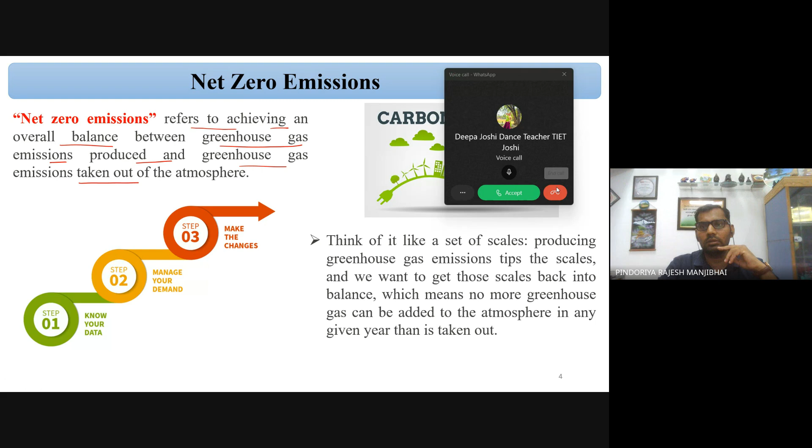Just 1 minute, just 1 minute.

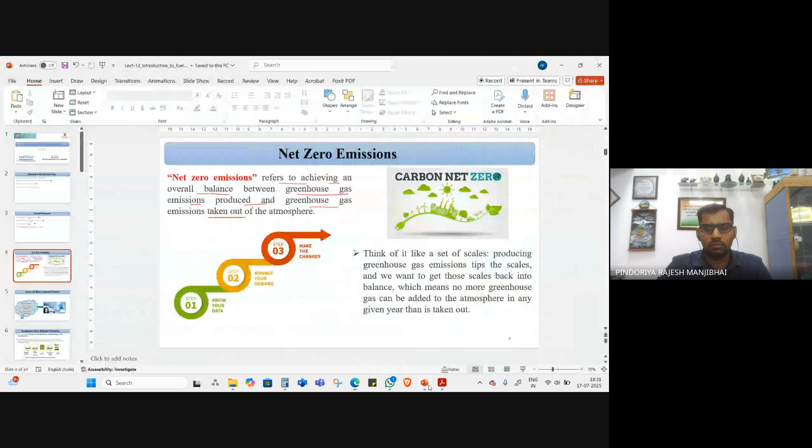Yeah, okay. So suppose you are designing the electric vehicle and you are producing 100 kilograms of CO2 in the environment, correct? So after the production of your vehicle, you have to put in the technology to reduce the 100 kilograms of CO2 from the environment. Then we can say our application, our design, or our product produces net zero emission.

So whatever amount of CO2 you produce during the design, after the design we have to remove that 100 kilograms of CO2 from the environment. Then we can say our design or our product is net zero emission. So how can we achieve this? Step one: know your data. First you have to find out how much CO2 will be produced from the product. Then you have to manage your demand, because we cannot compromise with our product.

Suppose you are planning to make like 50 electric vehicles per day, but because of the CO2 level, you cannot compromise with the product. Okay, so we have to manage our demand, then make the changes. What type of changes can we make so we can achieve net zero emission? Think of it like a set of scales: producing greenhouse gas emissions tips the scales, and we want to get those scales back into balance. That is the simple meaning. Whatever amount of CO2 you produce, we want to remove it after the production.

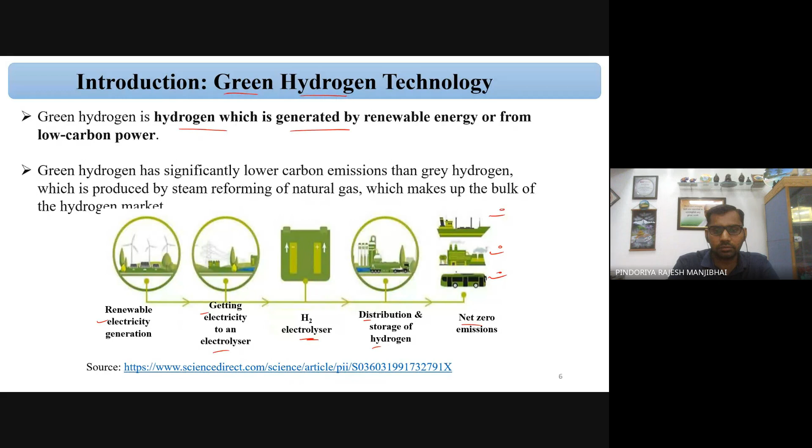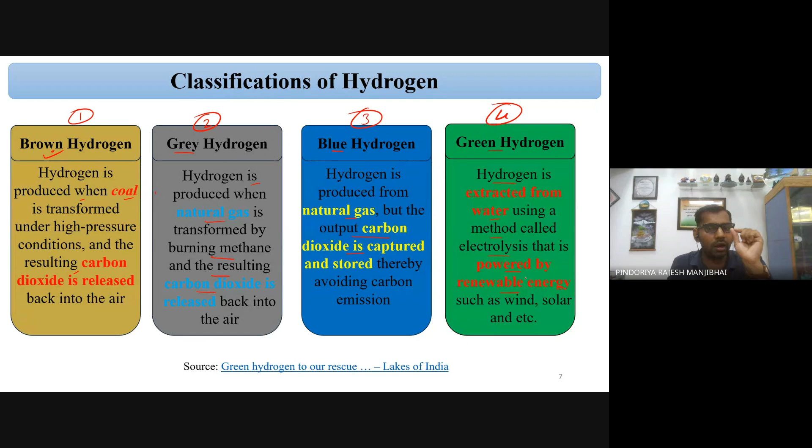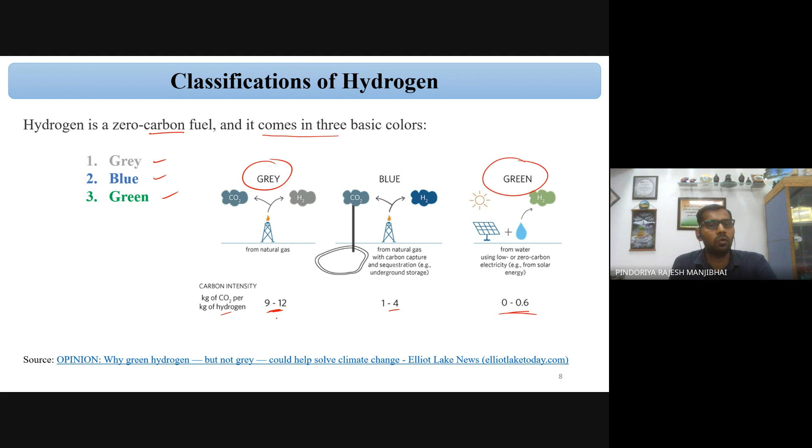Correct? So you can see green hydrogen produces very, very little CO2, but gray hydrogen produces 9 to 12 kilograms of CO2 per kilogram produced. Okay. So that's why people want to use green hydrogen instead of gray and blue. Okay.

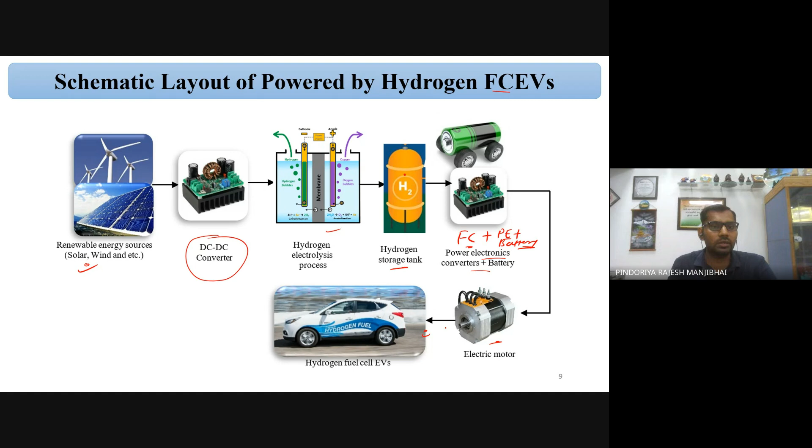So three components here. There is a fuel cell, because the fuel cell produces the electricity, then power electronics, then battery, and finally the electric motor, and finally the hydrogen fuel cell electric vehicle. So these are the major components in the hydrogen fuel cell electric vehicle. So, schematic layout of the green hydrogen vehicle.

So yes, students, if anyone has any confusion, then please let me know.

So the schematic is the same as the battery operated electric vehicle. The only changes are the fuel cell and the hydrogen tank. In the IC engine, we have a petrol and diesel tank, but the fuel cell is missing. But in the hydrogen vehicle, we have a hydrogen tank and we have to add the fuel cell plus electric motor. Correct? So the only additional components are the fuel cell and the hydrogen tank. Suppose we are saying it is a green hydrogen vehicle. Okay.

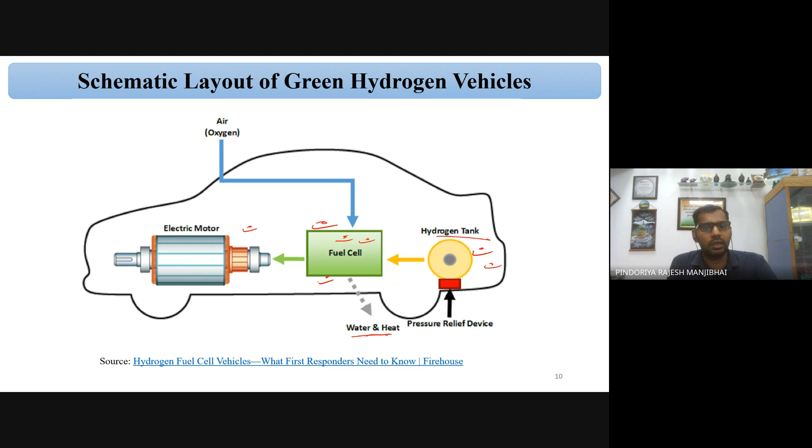And the output is only water and heat, and the water is only drops of water. It is not like 1 liter or 2 liters of water. It is only a few drops of water, and that is the only outlet because CO2 is 0%, so no CO2, only water and heat. Correct? So that is the outlet, we can say.

So how does it work? Hydrogen is passed into the fuel cell. We pass the hydrogen into the fuel cell along with the air. The air we can pass directly from the environment, as shown in the figure. So we only have to pass the hydrogen plus air into the membrane, otherwise we can say the fuel cell.

Okay, inside the fuel cell, the hydrogen atom is split into protons and electrons. So this is the fuel cell. Inside the fuel cell, the hydrogen atom is split into two components: protons and electrons. The electrons, especially the steady flow of electrons, are the electricity used to operate the electric motor, and that drives the vehicle. Okay, so this is just the operation of your vehicle.

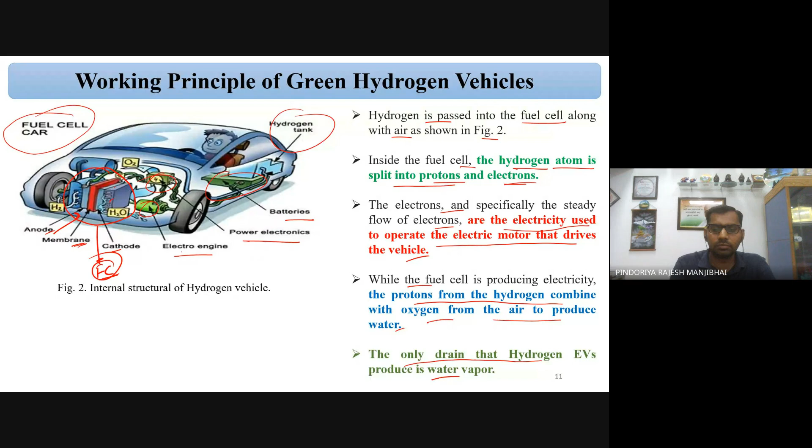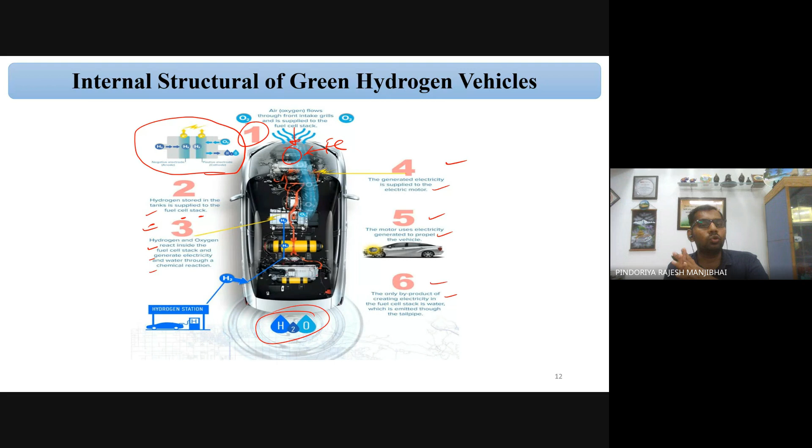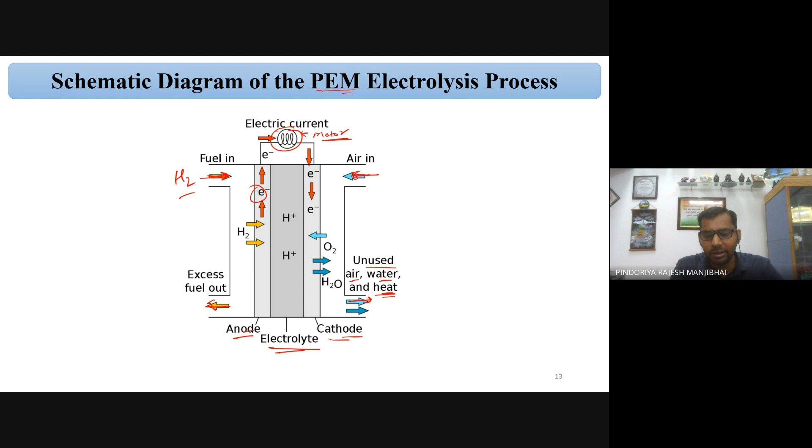So water is not too much, and heat we can again convert the heat into maybe cooling, or maybe any other application, correct? But ultimately there is a loss. So detailed mathematical modeling as well as chemical reaction we will discuss in maybe the next class.

So what is a fuel cell? So till now, any confusion, any query for the fuel cell? Any query? Sir, not on the fuel cell thing, for the hydrogen vehicle. Yes, sir, one thing.

Sir, how can we control the reaction within the fuel cell to increase the amount of electricity?

That is the major disadvantage in the fuel cell, otherwise we can say the hydrogen vehicle. One thing is storage of the hydrogen, how we can effectively store the hydrogen, because hydrogen is very dangerous. And second thing is controlling the flow of the hydrogen, because continuously we have to generate the electricity. So how we can control the flow of the hydrogen, correct? So that is a major challenge as of now for the fuel cell electric vehicle.

So exactly I don't know, so how we are able to control the flow of the hydrogen, but still research is going on, and that is the only two disadvantages in the fuel cell electric vehicle. First one, that is storage of the hydrogen, how we can effectively store it, so there is no dangerous effect in the vehicle. And second one is flow of the hydrogen, how we can control the flow of the hydrogen. So those are the two major challenges as of now.

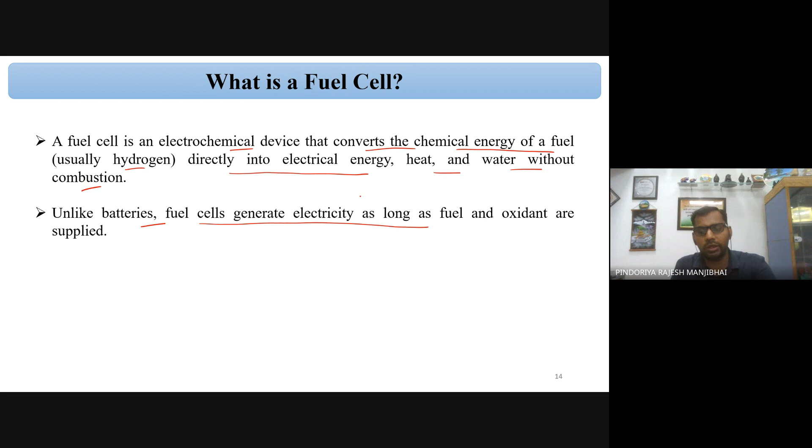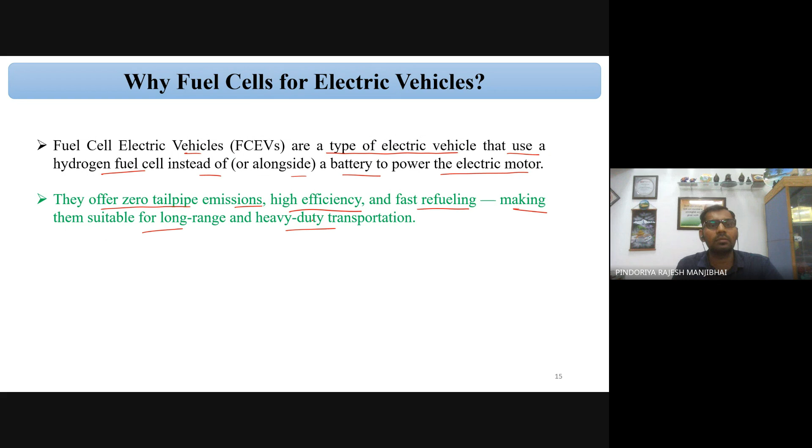They offer zero tailpipe emission, high efficiency, fast refueling. So just suppose you want to refuel the hydrogen, it will take only 2 to 3 minutes. It is the same like CNG, compressed natural gas, correct? Making them suitable for long range and heavy duty transportation. So that's why people want to use the hydrogen vehicle. So high efficiency, zero tailpipe emission, and fast refueling.

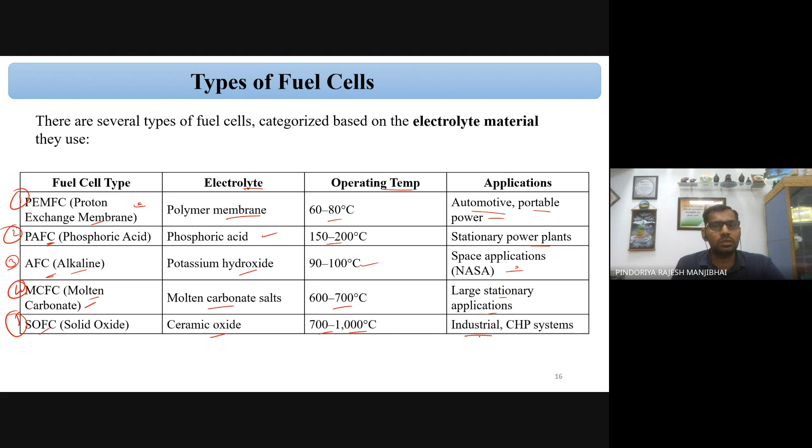Yes, so these are the types of fuel cells which we can use for different applications. For electric vehicles, we can use only proton exchange membrane as of now.

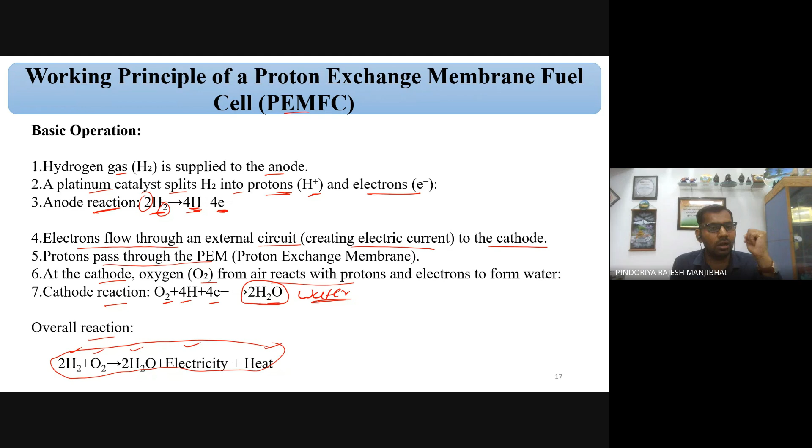Is there any confusion for this reaction? There is an anode reaction and a cathode reaction. Because this is a chemical equation, maybe you forgot the chemical reaction, so if you have any confusion, please let me know. Because this is a balanced equation, we account for hydrogen atoms as well as oxygen atoms, and the output is electricity plus heat.

Sir, how only protons can pass through the membrane? Yeah, that is part of the electrolysis process, correct? So we can use different types of membranes. There is a membrane property: they cannot pass electrons, they cannot pass both properties equally. That is a property of the membrane. That's why I said for the fuel cell, the heart is the membrane. Based on this membrane, we can pass particular protons and particular electrons.

Suppose we use a low cost membrane, correct? Not a high cost and high efficiency membrane. Then it is very difficult to pass the proton and electron separately. So it is a property of the membrane, and that is the heart of the fuel cell. Got it? Yes. Otherwise, it is very difficult to achieve separation of the proton and electron. It is very difficult.

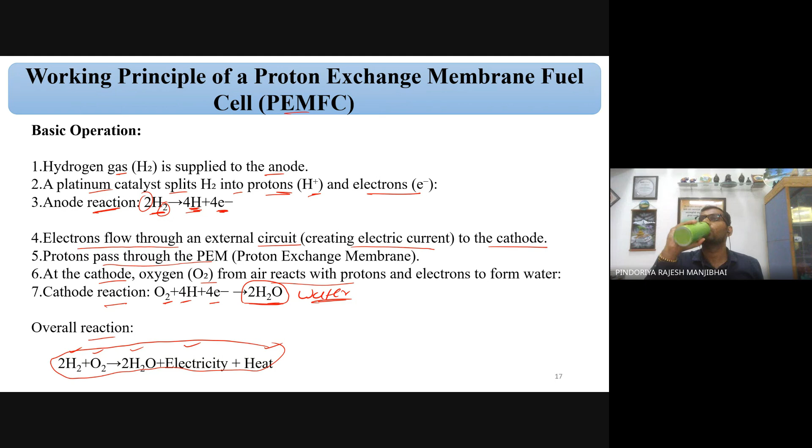So key characteristics of the proton exchange fuel cell: operating temperature 60 to 80 degrees. Efficiency 40 to 60. In the IC engine, efficiency is maximum 20 to 23%, but in the fuel cell, the proton exchange membrane fuel cell efficiency is up to 60.

Startup time less than 1 minute. Power density high. Emission is only water vapor, so no CO2 emission. Fuel is pure hydrogen, needs purification. Voltage per cell is 0.6 to 0.7 volt, depending on load and temperature. So normally voltage per cell is 0.6 to 0.7.

So this is the same as we can say the battery cell, correct? In the battery cell, we can say nominal voltage is 3.7 volt. But in the fuel cell, voltage per cell is 0.6 to 0.7. It is the same like the semiconductor diode forward voltage. In the diode, forward voltage is 0.7 volt, correct? So it is the same as the proton exchange membrane fuel cell, voltage per cell being 0.6 to 0.7 volt.

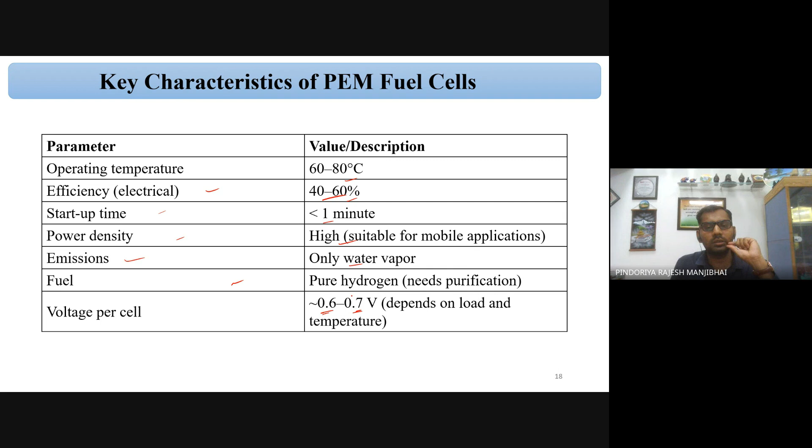So example of the proton exchange membrane fuel cell used in vehicles: Toyota Mirai, Hyundai Nexo, Honda Clarity fuel cell, hydrogen buses and trucks. Hydrogen trains already run in India, on the railway track in Himachal Pradesh, and in Germany many vehicles are based on hydrogen. So we can say it's a green hydrogen vehicle with zero emission. As of now you can see Toyota Mirai, Hyundai, Honda Clarity fuel cell, and hydrogen buses and trucks.

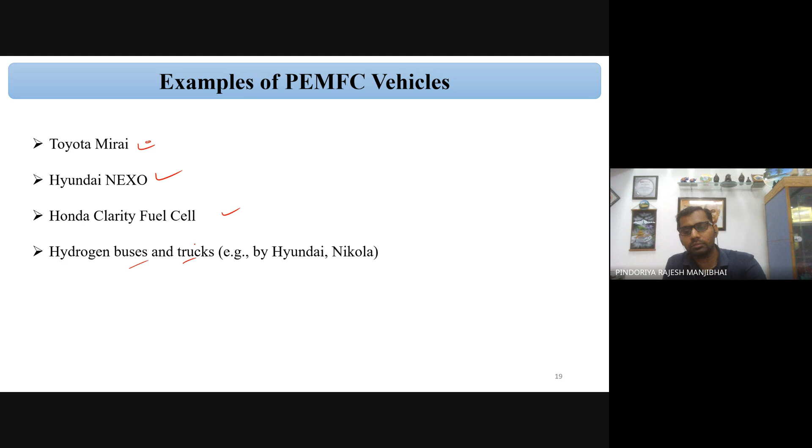Challenges: hydrogen storage and refueling infrastructure, high cost, platinum catalyst, durability under load cycle. As I said, we have to control the hydrogen flow, that is the load cycle. So how can we control the hydrogen flow? Efficient hydrogen production, that is green hydrogen. How quickly can we produce the hydrogen? That is the most important part.

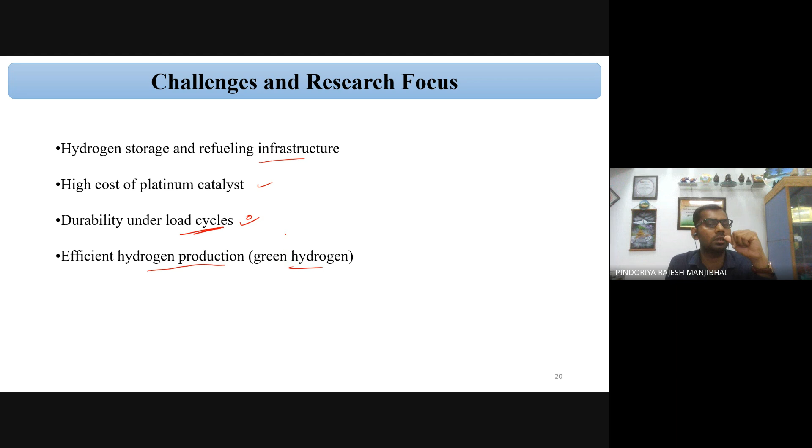So this is the current challenge and research focus for green hydrogen. Otherwise we can say blue hydrogen, gray hydrogen. But for electric vehicles, we can target only green hydrogen.

Advantages: yes, many advantages. Conversion efficiency is high, easy and simple construction, requires very little attention and maintenance, high power to weight ratio. Hydrogen efficiency is very high, so high power to weight ratio. Fuel cell does not make any noise, so we can say silent operation. Less space required, quick operation, and can be installed at the use point, so we can install anywhere. Apart from this, many more advantages are there. Quick refueling. Cost is high, but we can compromise on cost because environment is the most important part.

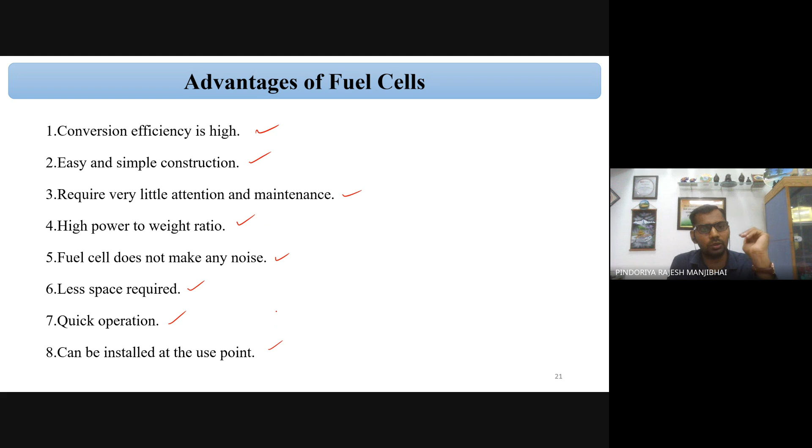How do fuel cell electric vehicles work using hydrogen? So this is the same thing, let me explain in detail. All electric vehicles, including fuel cell electric vehicles, use electricity to power an electric motor. So here we use hydrogen to generate power for the motor. In contrast to other electric vehicles, FCEV produces electricity using the fuel cell.

During the vehicle design process, the manufacturer defines the power of the vehicle by the size of the electric motor, because we have to decide the size of the membrane and the size of the fuel cell. That depends on the manufacturer, and on the weight of your vehicle. The vehicle receives electric power from the appropriately sized fuel cell and battery combination. If you want to learn more about the fuel cell, please go to this link for more information.

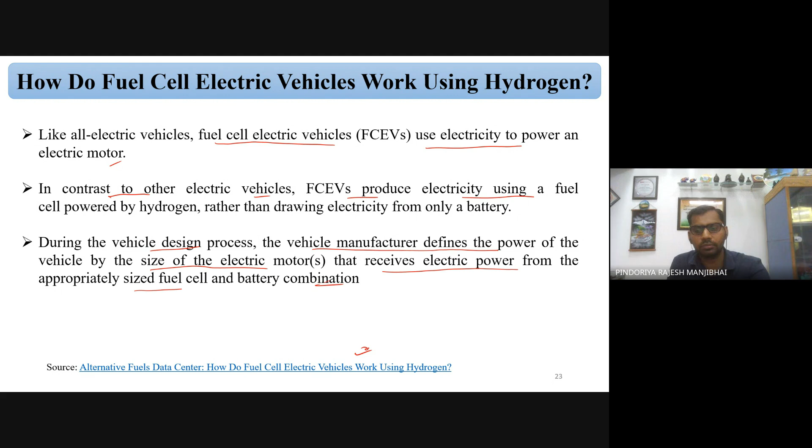The amount of energy stored on board is determined by the size of the hydrogen tank. So how much hydrogen we have to store depends on the hydrogen fuel tank. This is different from all-electric vehicles, where the amount of power and energy available are both closely related to battery size.

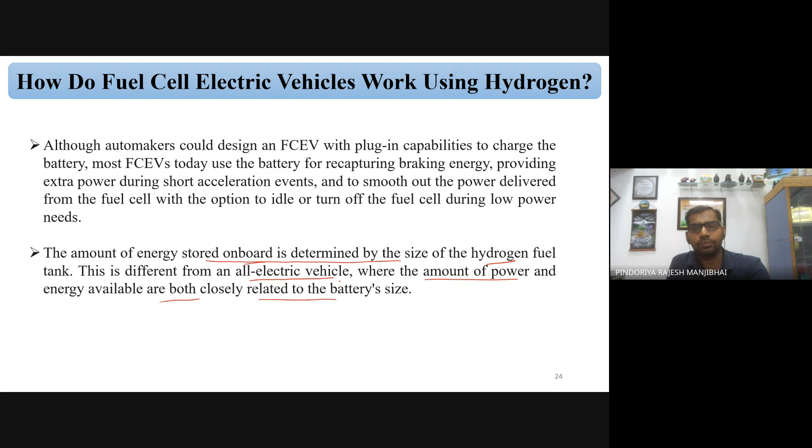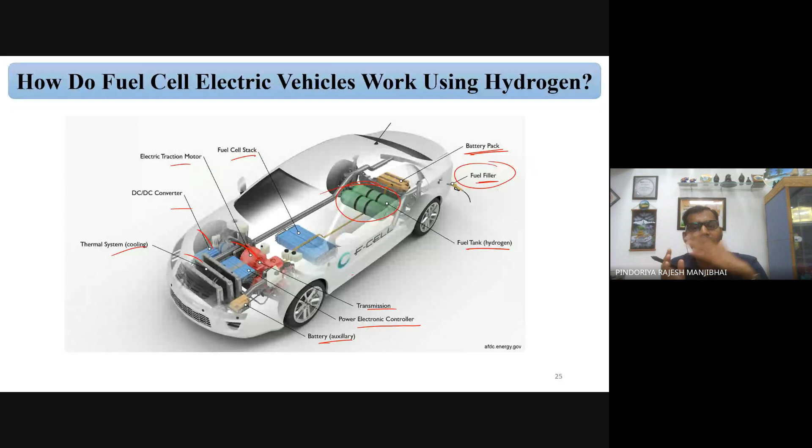So you can see the actual picture of the fuel cell vehicle: fuel cell stack, electric motor, DC to DC converter, thermal cooling, battery, auxiliary battery which gives supply to entertainment devices, transmission shaft, power electronics converter or power electronics controller, fuel tank with hydrogen, and a battery pack, and this is the fuel filler. Why a battery pack? Because whatever energy we generate is stored in the battery, otherwise you can directly feed it to the motor. So normally we use a small type of battery as backup power, so whatever energy is generated, we can store it and then give it to the electric motor.

So key components of hydrogen electric vehicles: battery, auxiliary battery pack which stores whatever power is generated, DC to DC converters to maintain constant DC link voltage, electric traction motor, fuel cell stack, fuel filler to filter the hydrogen, fuel tank, power electronics controller, thermal system, and transmission. Any student have any confusion? What is the use of the battery pack, DC-DC converter, electric traction motor, or any components? So here, total I think there are 9 to 10 components.

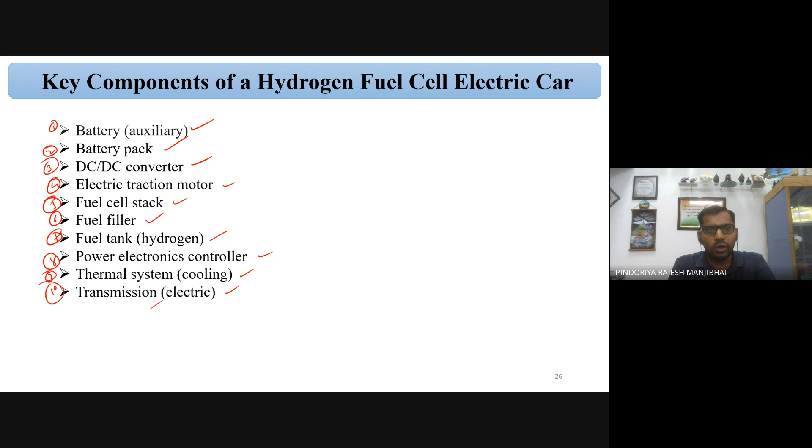There is cooling, transmission. There are electric motors. Correct. Suppose you have any confusion, any query, then please let me know. Otherwise, I already explained every component. There is a battery, auxiliary battery; in the electric drive vehicle, the low voltage auxiliary battery provides the electricity. Okay, so there are your entertainment devices. Battery pack, there is a high voltage.

Yes. So is hydrogen in liquefied form or gas form? Semi-gas form, not pure liquid, not pure gas. Semi-gas form. So same like the compressed natural gas. So do you know the CNG vehicle? No, sir. In Nepal, CNG vehicles are not available. Only petrol and diesel vehicles. Petrol and diesel vehicles. LPG gas is also used. Oh, yes, LPG is available. Yes, sir. Tuk-tuk tempo is there, and they

use LPG gas. Yeah, so all these gases, compressed CNG, LPG, are not 100% gases. There is a combination; we can say semi gases. It is not like 100%. You can see a little bit is in chemical liquid form and some in gaseous form. That's why we say these are semi gases. Correct. It is the same with hydrogen here. Hydrogen is not 100% gas, it's a semi gas. That's why we have to use the fuel filler, so we can get 100% gas. For the generation of electricity, we have to use 100% pure gas, not semi gas. Correct? Yeah.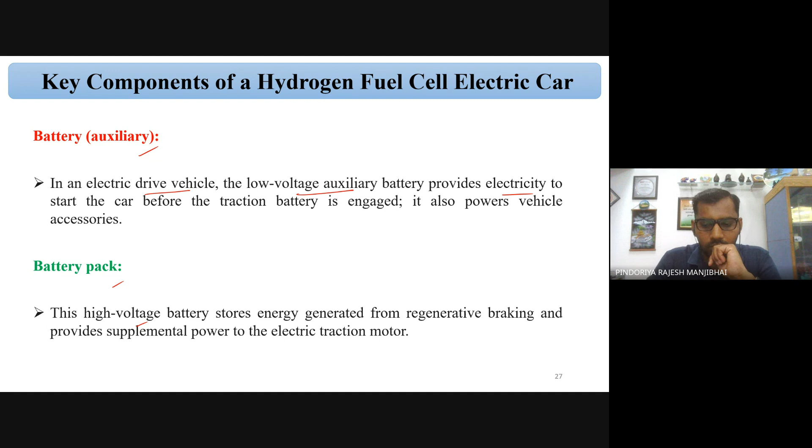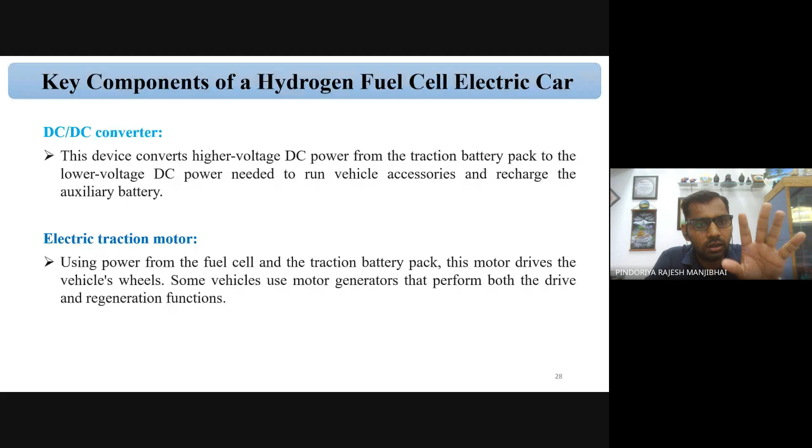Power electronics controller, we have to control the power. Thermal system, cooling, yes, because ultimately it will generate heat, so cooling is most important. Transmission, there is your motor, so we have to connect the transmission. Maybe the in-wheel motor; normally in-wheel motors are available for two-wheelers and three-wheelers. For four-wheelers, a transmission is compulsory so we can transmit the power.

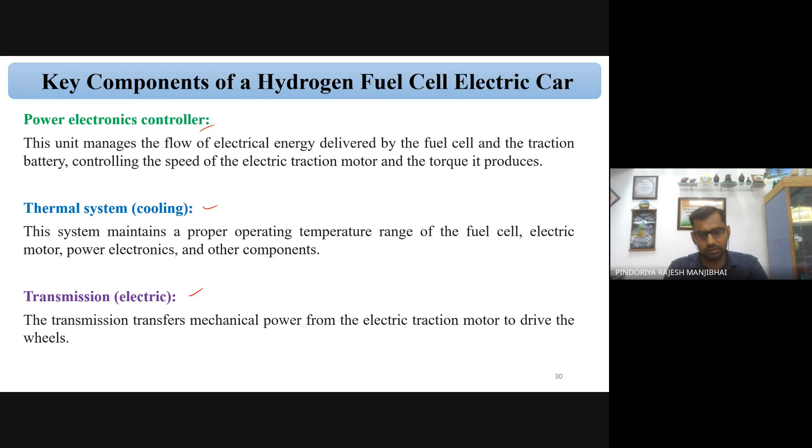In the next class, we will be discussing the operational characteristics of the proton exchange membrane fuel cell for e-mobility. We will see the operational characteristics and mathematical modeling of the proton exchange membrane fuel cell. One by one equation, we will see how much voltage is required for the separation of the proton and electron, because for the electrolysis process we have to give a power supply, and that power supply we can get from renewable energy sources. So in the next class we will see the detailed analysis and characteristics of the proton exchange membrane.